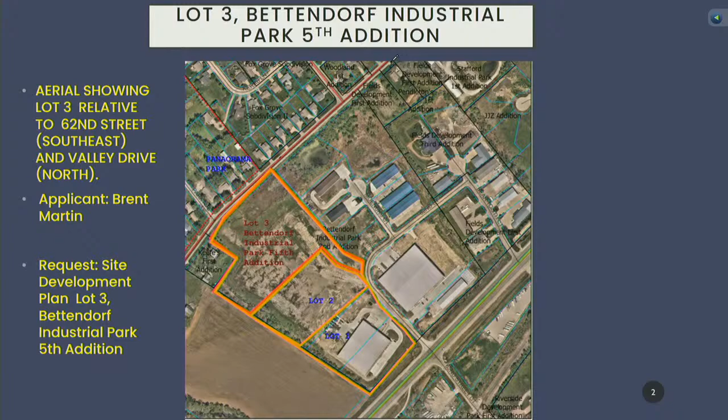Essentially, you have Valley Drive up here, acting as a boundary between the residential and industrial areas. It's been that way since 1972, when this all was redone in I-2 zoning, and that's what you have throughout this area. This is the lot we're looking at right here. Everything below Valley is I-2. You go to the area up here with the Fox Grove subdivision, that is R2, and then Panorama Park is all single family in nature.

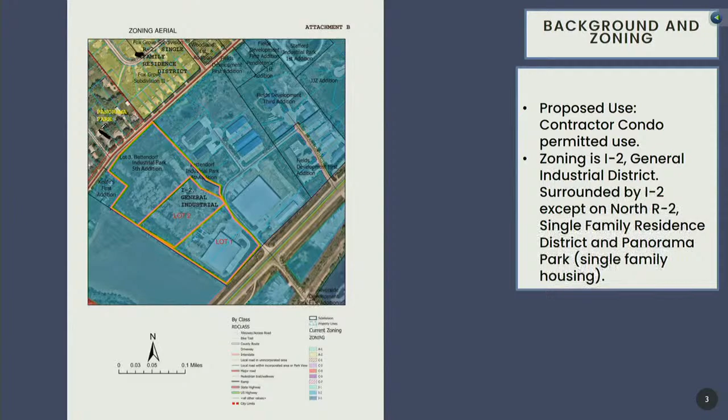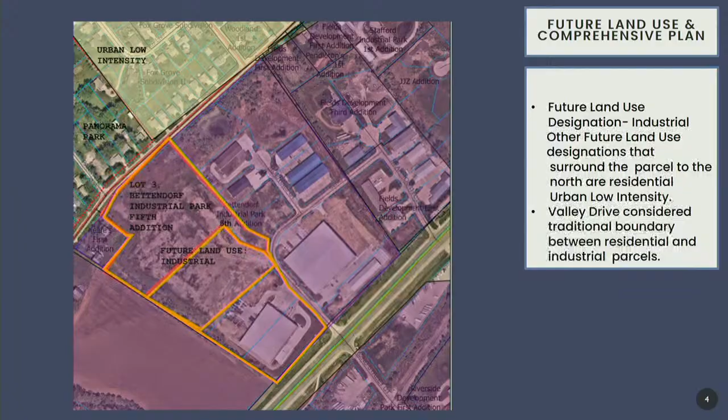The future land use designation for the area is industrial, which would permit the I-2 zoning. As I mentioned before, Valley Drive has been considered the traditional boundary between the residential and industrial parcels. The area we're looking at tonight is this lot of record, which was a replat done of Bettendorf Industrial Park 2nd Addition. And the entirety of the 5th Addition is essentially this area right here, and that was lots 10 through 13 of the 2nd Addition.

This is the site plan proposal with means of entry right here. This is a paved area with parking coming off of 62nd Street. The building is located right here. We have a 44-foot wide paved drive and parking area to gain access. We also have parking at this time being sufficient for that structure.

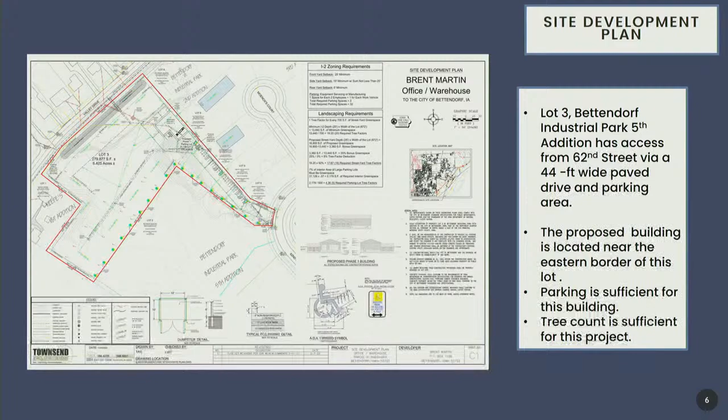Of course, everything as it's graduated in will require more amended site plans to do this, and the tree count is sufficient at this time for the locale. This is the potential staging, we have 8, I should say 9, other buildings that would be placed on this lot.

This is the current structure we're looking at. But just to give you a heads up that they intend to go forward with additional buildings, and then this whole entirety will be paved in the interior. And that'll require an amended site plan, of course, for every staged-in group of structures.

Water, gas, and electric primarily are going to be coming off of Valley. We do have a sanitary sewer connection that is stubbed right here. The stormwater essentially is going to be compensated for - we go back here to the outlet here. This is collecting water from other locales so that this area can then release water. This is the area that compensates for the release here freely off of this lot.

And this is the way the structure will look, typical of the contractor condos that we've seen. We do have garage and storage areas, and then the interior will have offices located.

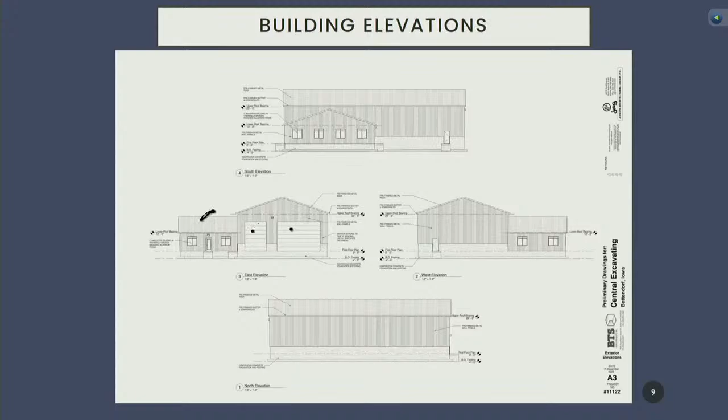As a result of the location of this lot of record, it is entirely contained within the 100-year floodplain. So there will be a requirement for the petitioner's engineer to submit the proper paperwork to elevate the entirety of the lot or the area being built out by 2 feet above the 100-year floodplain level, or the 1% annual flood probability level.

Staff would recommend approval based on the fact that this follows goal C of the comprehensive plan to attract and retain business and industry.

There are 5 conditions listed here regarding sanitary sewer, the annual chance of flooding, and the remediation of the ground to bring it up to a level out of the 100-year floodplain, and the sanitary sewer easement being sufficient on site. Valley Drive might be considered as a future entryway to this site as it builds out.

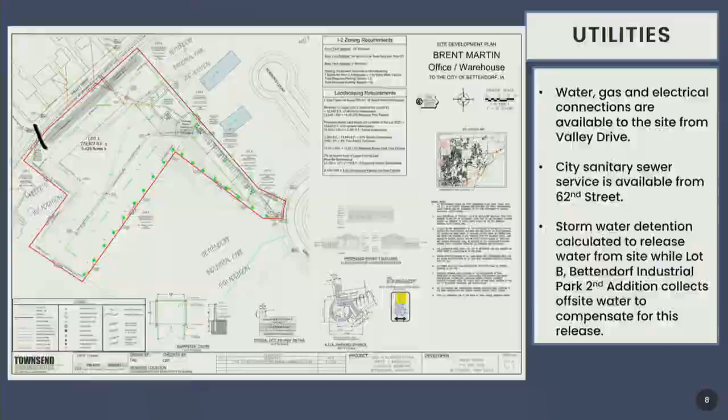Okay, thank you. And I believe there are some potential fire conditions that would require that. At full build out, if you're talking about 9 buildings, a secondary access would be needed. We would line it up with the street directly across, and we would try to limit the width as well in the future, so that it would not accommodate truck traffic. We would try to just limit it to residential type vehicles, so pickup trucks, nothing larger. But ultimately, yes, that would be the requirement upon full build out.

Okay, so that would be an expectation. Once he gets to that point, he needs to have that. Yes. Okay, all right. That makes sense. Thank you.

And it's Roy, while you're addressing that question, just a little more to bootstrap on that, that would be a private drive, right? Correct. Yeah, there will be no city street access through here. So would we have any concern about cut-throughs coming in off 62nd, cutting through there to get to Valley Drive, especially with the limited amount of connection points we have between State Street and Valley Drive?

Ultimately, that would be up to the developer to design the parking lot such that it wouldn't be an inconvenience to them if it did happen. Like I said, it's going to be required via fire code.

Okay. And then regarding, and maybe you're the right one to answer the next question, I don't know, but regarding the grading, the filling, all those kind of things, will the entire lot property be required to be filled when the initial construction is done, or can it be filled and graded in stages as it's developed in stages?

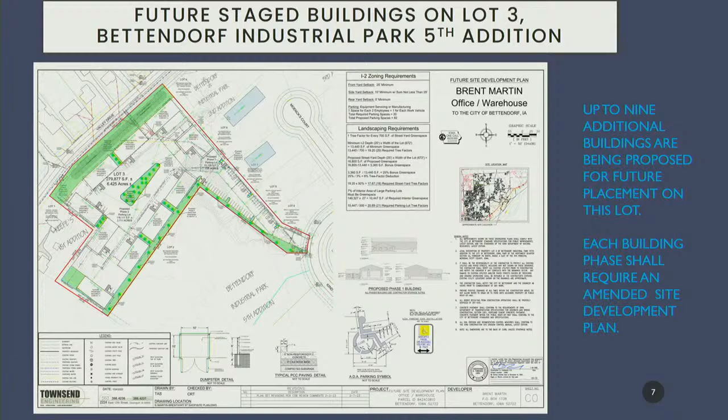Ultimately, Greg or Taylor, that would be a floodplain question. They'd have to secure that each structure is built, and I believe Taylor could elaborate on that, but I believe it's a two-step process, one initially for the fill, and then is there one after the structure is built to certify that it meets the elevation requirement.

Taylor here. Anything in the floodplain, any development requires a local permit, and that would need to ensure that any fill, excavation, or buildings don't raise the floodplain significantly for the buildings. If it is in the floodplain, they would need to meet our minimum 2 foot above base flood elevation. I will note it's currently in the floodplain, but there are some future maps coming out that might change this area. There are currently preliminary maps issued by FEMA. So in May this year, there'll be some updates to this area. We don't have those before you at the moment, but those are all considerations.

So if I understand Roy's question, what he's asking is, are they going to have to go through this process for each building if they don't do it all at once? Would that be? Yeah. Yes, okay.

Can I jump in, Mr. Chairman? I think there's two questions. Every building will need a site development plan, so if they're going to bring other buildings into this site, they'll need site development plans. They're going to have to have floodplain development plans that are approved as well. I think the question, and I don't know that staff can answer this, is will it be final graded all at once, or is he going to incrementally grade the property? And I think that's up to the builder if he's going to do that.

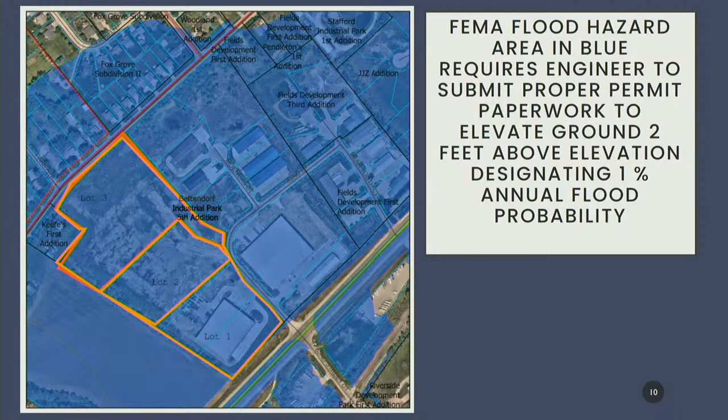I'll answer the detention question first, Roy. What Greg mentioned during his presentation is when this subdivision was built, the area in the northeast corner he's circling is a very low-lying area, and because of the overall topography, it was agreed that they're providing compensatory detention, detaining for water coming off-site to an equal requirement as what would be done on-site, because there was no way to provide detention due to the terrain. There would be no way to get that water to the detention basin and outlet it.

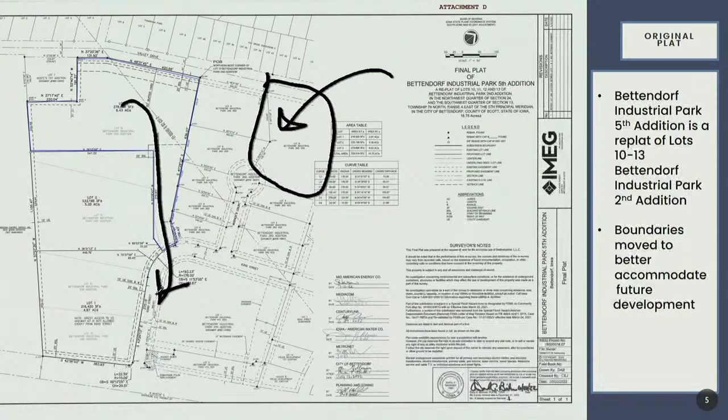Into ultimately the 67 ditch. Generally speaking, the way stormwater detention works is water generated off-site that we call pass-through is not required to be detained. You literally pass that through your basin and only store the increase on your site. So in this subdivision, approved I think in 2017, what we agreed to is they're detaining the water coming undetained down from the hill and releasing it through their subdivision, and their water gets undetained. It's still the same rate leaving the subdivision. They're just doing it in reverse.

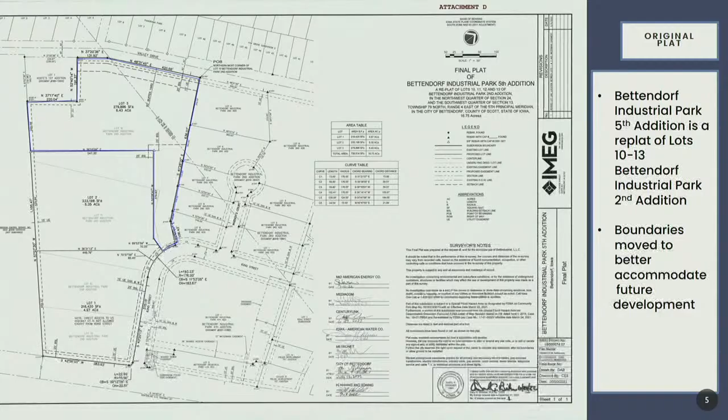Okay, thanks, that helps. Hi, Chris Townsend Engineering. I'll answer the question about the dirt moving. The owner of this lot is an excavation contractor, so that's pretty helpful. He will actually grade the entire lot, and really the majority of this lot is already above the floodplain. So we're in pretty good shape to begin with, but he'll take care of the entire thing right away. Then we will have to submit for future buildings depending on how they land.

Chris, it's Roy. Will that be stabilized with grass or something once it's graded? Yes, he has to. So he does this every day, so they're pretty good at it. All right, thanks.

Okay, any other questions? All right, anyone in the audience that might have a question? Okay, seeing none.

Anyone want to make a motion? Sure, I'll move to approve case 23-006, subject to staff recommendations. Second that. Okay, all in favor say aye. Aye, aye, aye. All opposed, same sign. Motion carries.

I think we're doing a switch here. What's that? I'll do my own slide. Hang on just a second.

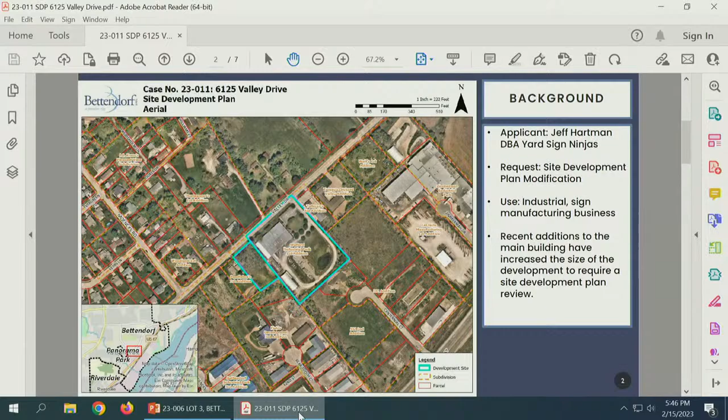So the site is shown on the map, Valley Drive, just north of Centennial Court with no access to Centennial Court. As mentioned, it's an industrial sign manufacturing business. This location is in the I-2 General Industrial District. To the north of Valley Drive there's single-family residential, and the surrounding properties south of Valley Drive are also in the same industrial district.

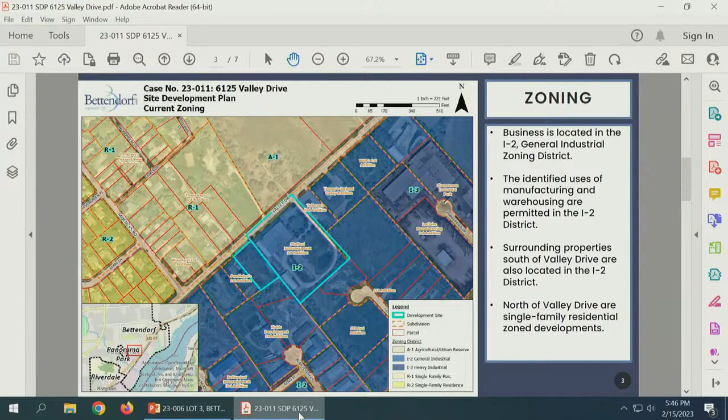The proposed site plan, or the site plan that identifies all existing infrastructure, is what we're looking at, seeing if that meets our code and making sure everything is in compliance, is shown before you. The original building was built in 1980, and that is shown here. Subsequently there were additions - some were an outdoor storage area that was enclosed, then some offices, and a hoop barn for storage, built in the 2000s. So we have some added additions that were implemented.

Parking area and loading docks are all located to the rear, and those aren't proposed to change. The parking for employees and limited customers is located off of Valley Drive, and it's accessed via a curb cut, which also isn't changing.

There has been some additional non-structural development, which includes filling of floodplain. There is floodplain back here, and some changes and fill being moved around on the exterior of the property. That's all included in the site plan review. Local permits had to be pulled for floodplain development and COSESCO permits for all the fill, since you're having bare dirt being moved. So those have all been submitted and reviewed.

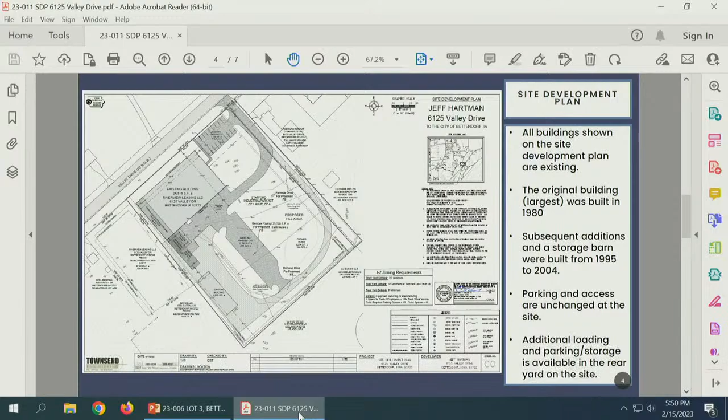Products are going to be, from what staff has been told, the same. There is some renovation occurring inside the building that will move the industrial process around, but that will not affect the overall site for this review.

With that, staff has looked at this from all angles and agrees that it does meet our code for site development and for the industrial area, and recommends approval for this modification to site plan for 6125 Valley Drive. Staff will note any future major modifications will require further review by this body, and I can take any questions.

Any questions from anyone? So Taylor, the note I wrote when I was going through this is essentially an after-the-fact action. These changes were made without the requisite site plan or other reviews when they were done. That is correct. The process would be to stop everything and make sure all the proper permits, whether building permits or floodplain permits, get the property into compliance. This is one step of that journey, and that's what's before you.

Was all that work done under the same ownership or multiple ownerships? I believe the owner has owned this property since 2012, so some of this could have happened prior to that, and in fact did. It's hard when there are incremental additions added over time, with 5 minor modifications that kind of go under the radar. Staff felt there were enough modifications to this site that it did require a review by this commission and then council.

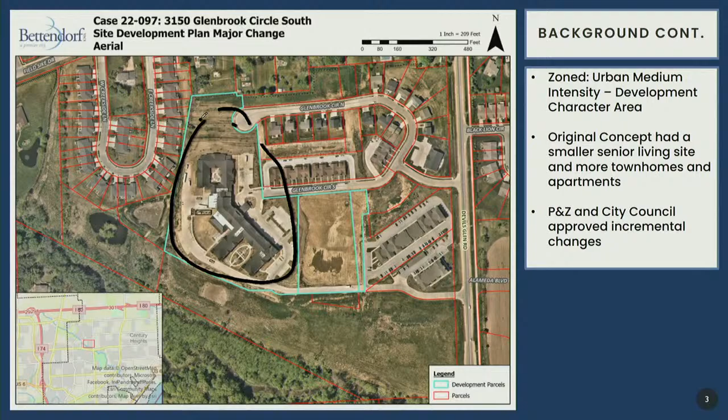A little more background: it's zoned urban medium intensity, a development character area zoning classification. The original concept had a smaller senior living site, which is the senior living site in question here. It was smaller in the beginning, and that has changed through some site development plans and replats that have come through this body. Those changes have been incremental in nature. The whole site, as shown in the original concept drawing here, has had incremental changes over time. Remember, it is part of a development character area, so that whole zoning district takes into account what will be developed within all of that area and how it might interact and play with each other.

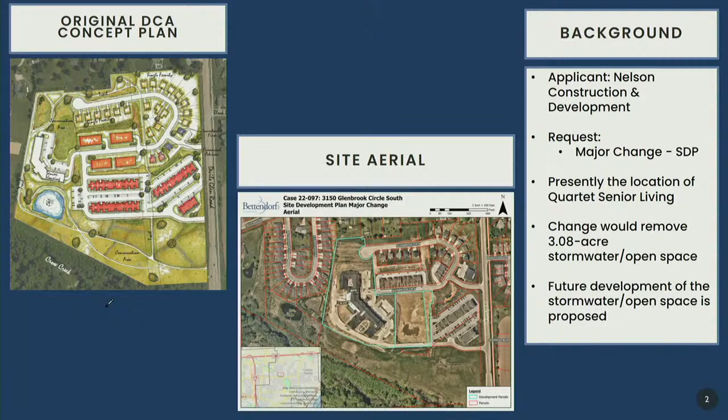Just to give you a little bit of a timeline, and refresh your memory on when you saw this case and how it looked at different times: when it first came before this body, it was a rezoning to create this UMI, urban medium intensity, development character area. That was back in 2018, case numbers 1896 and 1897. It was reviewed by this body, recommended positively, and subsequently approved by City Council. It was before this body on December 19th of 2018.

Came back again for a site development plan for the quartet specifically to start the building process after the rezoning. That was December 18 of 19. Those numbers are oddly similar, but it's really not that odd because of the way the dates fall on the calendar. And then in 2020, we saw a replat that brought this whole area into one lot of record.

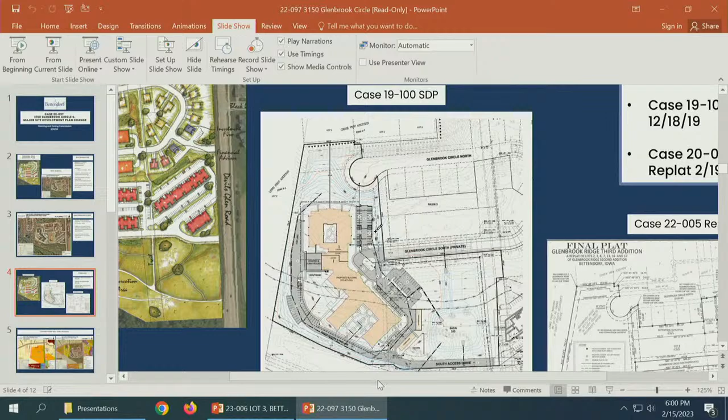That occurred in case 22-005. I will note on this plat that there are a few things that I think you should be aware of relative to this plat, and I'll zoom in here for a second to show you what those are.

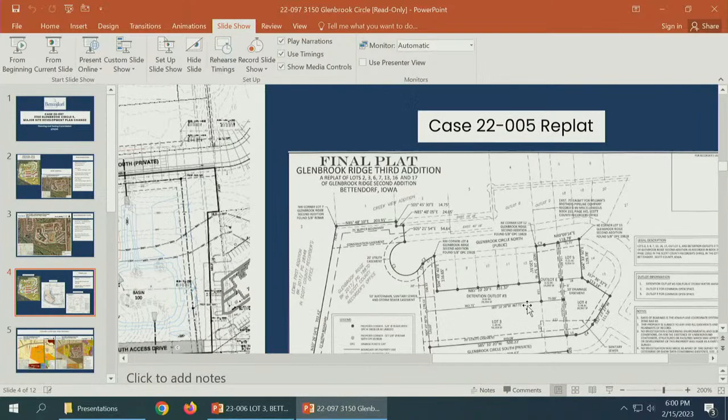Lot 2, which is the lot in question, is designated as detention area. And then Lot F, just to the east of that, is designated as green space. So you have a detention area and a dedicated green space next to each other as platted, and that's reflected in the plat notes. Out Lot F for common space is note 3.

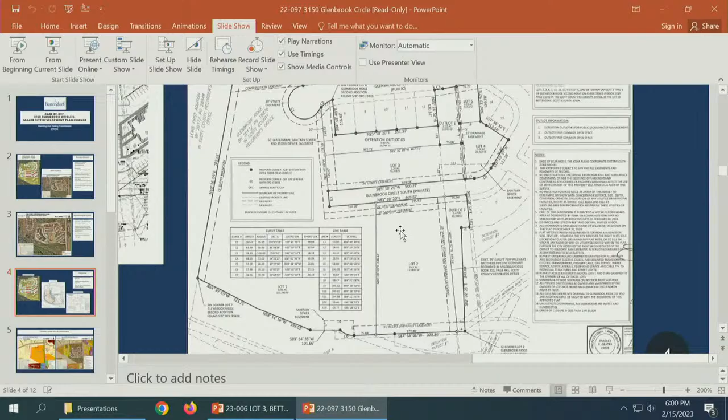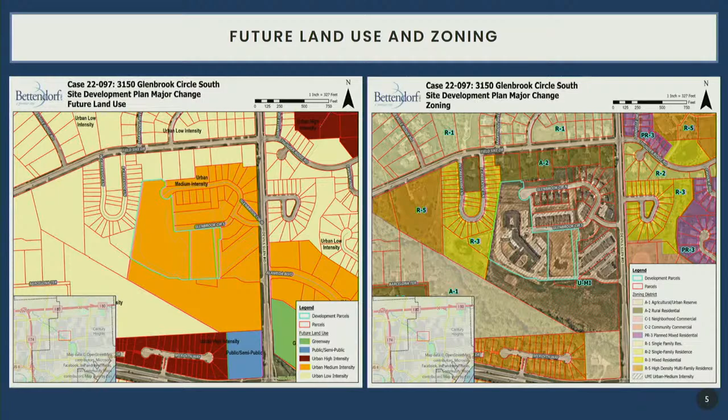Just to show you in map format, the future land use is urban medium intensity, and the current zoning is also urban medium intensity. Those are slightly different concepts, but the case being made here is they align, right? So we have alignment with our zoning and alignment with our future land use map. That's not an issue.

Background out of the way, let's talk about how we do this analysis. Our code is very specific on how we do site plan change analysis for development character areas. We're looking at this from a holistic view and a site view. We have the development character area, which is all of the Glenbrook subdivision, and you have the specific sites within, so you're playing those two concepts back and forth with each other.

Step 1 is an analysis of the permitted uses and intensity. The use that is existing, the senior development or senior living center, is a permitted use. And it would appear that the proposed use is also a permitted use, since it would be from the same company and be another style or type of senior living. So permitted use is not an issue.

So the impacts of the removal on the intensity side of this question: look at how many units per acre. It's kind of a simple math thing here. If you have X units per acre and you reduce that acreage by taking a lot out, or 2 lots out of that site development, you increase the number of units per acre, just simple math.

So the quartet currently has roughly 120 units on 11.4 acres. That would change to 120 units on 8.3 acres. So you shouldn't be surprised that there's an increase in the units per acre just by doing so. That's about a 37% increase. In units per acre, it's 10.54 currently to 14.46, again just by taking out that 3 acres.

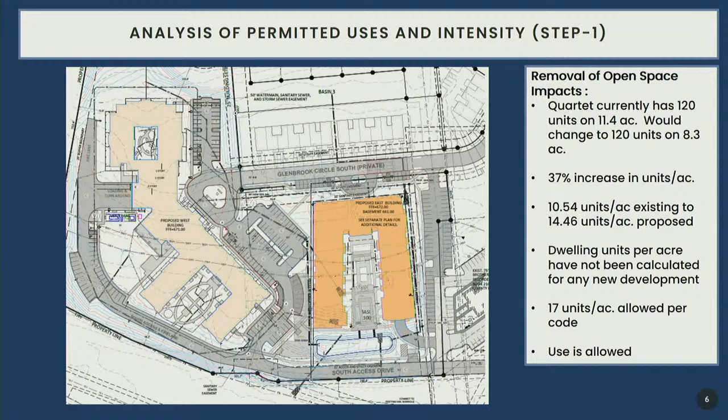I would note that 17 units per acre are allowed per code, so these changes are still within code. Even if you were to agree to take this 3 acres out, the quartet would still have enough units per acre, and I already noted that the use is allowed.

The next part of our analysis, step 2 if you will, is a bit about frontage. So within the development character areas we have the ability to design the lots and some design standards relative to those lots. One of the things they want is frontages and depths that kind of match, so you have roughly equal distance from the depth of the lot relative to the frontage of the lot on a road.

And as previously presented, this lot had frontage here and frontage here, and a depth of whatever this deepest part is. But those were roughly symmetrical, they were about the same.

If you were to take this out, your frontage is limited to roughly this. So your frontage characteristic is much narrower, and your depth stays the same. What that's getting to is really flag lots. We're trying not to develop a bunch of flag lots in our DCAs as a design aesthetic, and also probably as an access transportation issue. So DCAs were kind of designed to avoid that. This does, in fact, create more of a flag lot by removing that.

3.08 acres. Probably not a huge impact when it comes to the actual circulation, because if they were to take out the 3 acres, it doesn't remove any of their allowed or required parking. So that doesn't change, and the access as far as driving in on Glenbrook Circle South would still be there. But that doesn't provide for whatever parking and circulation might be caused by this use. Again, we're not really doing that analysis yet today.

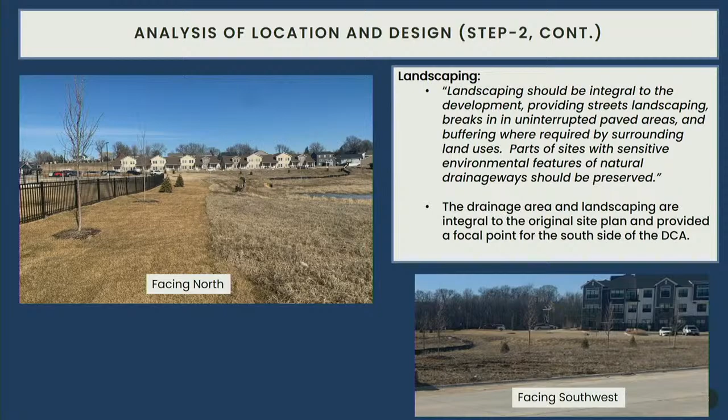I think we talked about stormwater management. There would be an impact of stormwater management. My understanding from talking with city engineers is that pretty much anything's possible with this much space. You could probably make stormwater work. You would do something underground or something deeper as far as a retention area. And we would have to do a formal stormwater analysis on the site development plan that came forward in the future.

Step 3, kind of proud of this slide. This was hard to put together. Step 3 is really about compatibility. In a DCA, we've created an overall character, so this whole subdivision should be viewed wholly. While we do have individual site development plans, those should always refer back to the original concept. That is the point of a DCA. And so, regardless of what's built, whether you look at the original concept, I would just point out why we're here, how much we've changed from the original concept in intensity of this use.

I would also point out that certain items of green space have kind of moved around this plan. In some areas, they were behind the quartet. When the quartet grew, they seemed to migrate over to this direction. Regardless of what happens here today, if we allow development to occur on the 3.08 acres, there will be some loss of green space and buffering and landscaping. The exact percentage or scale of that is really dependent on what's built.

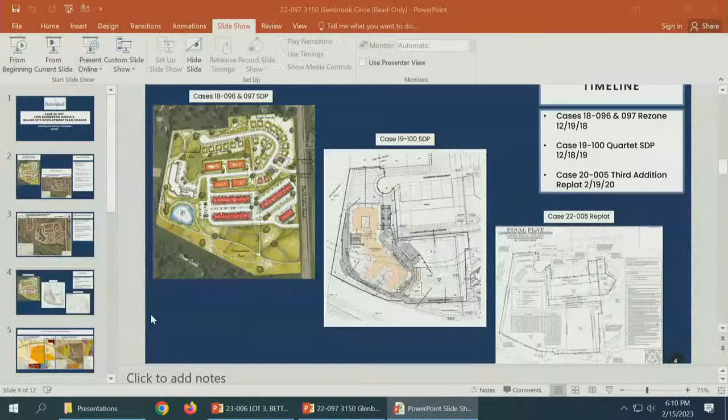So staff's recommendation—I have a quick flyover video I want to show you guys too, to give you a little bit better understanding of this site.

Staff recommendation right now is denial for case 22-097. We think the major site development plan change would result in an increase in intensity that's incompatible with the DCA plan. We think it creates lot frontage that does not meet the design standards of a UMI DCA, and would have a negative impact on green space and landscaping that was integral to the creation of the plan.

If you remember, that first plan had kind of the fountain water feature. That seemed to me to have migrated, maybe not to be a fountain and water feature anymore, but that green space migrated to become lot 2, the 3-acre lot. Sorry for the lot number mix-up. So we think that's kind of a negative impact. And then we think we're going to increase the imbalance of the desired housing mix beyond what we've already allowed to occur.

In preparing for today's meeting, I did have a chance to use the city's drone footage to get a flyover, bird's eye view, whatever term you want to use. First time I've ever done this. I hope it works, and I hope you're able to view it at home. But I would like you to get a flyover view of this.

Fingers crossed. So you're looking to the north, west, basically right now. Come on, computer. Actually good—when it pauses there, we get a little bit of a view. Yeah, there you go. Perfect.

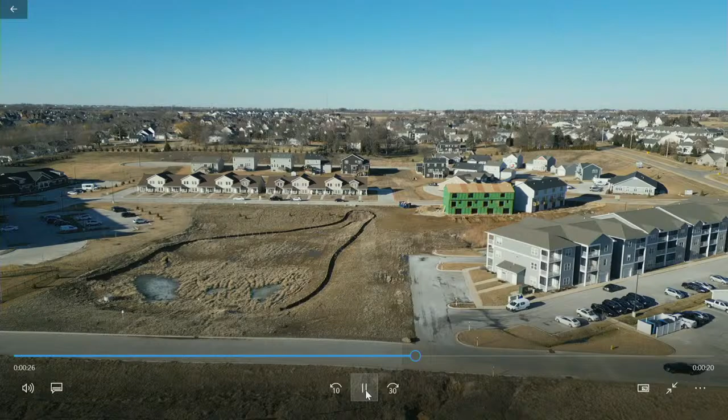I'm not sure why I'm paused again, but I just want to point out also the relation of height of building and shadowing. This is taken 2 days ago at roughly 3:15, 3:30 in the afternoon. And the shadowing from the 3-story building here—if there were some development to occur, I would have some concern, again in development character area, about creating shadowing on these townhomes that are kind of in the center of your screen here.

If you were to have a structure of the same height, south-facing, you would be creating pretty long shadows for a large portion of the day, depending on how high the sun is and all that stuff. But that's just something I would have some concern about.

Did you say those are rentals? I believe these are mostly rentals. There may be a mix of some owned and some rented.

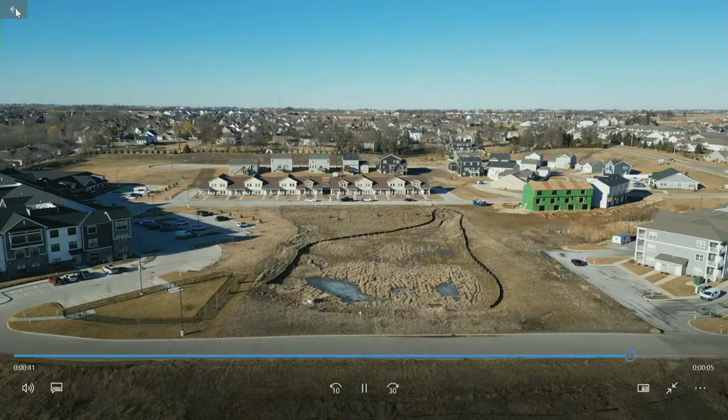Just a few more seconds left here. There might be 5 seconds left, but there's not really much to add after this. So, a new tool we're going to try and use, hopefully it was successful here today and gives you a little better understanding of the perspective of this case.

I would add that we did have one letter recommending denial of this case from a resident that's been put into the correspondence file, and it was also sent to the commissioners as well. But that letter did come out against the case being approved. I'd be happy to answer any questions you might have.

All right, any questions? Mark, this is Ann, I have a couple questions. First of all, I really appreciated having that drone footage. That was a really nice enhancement, so thank you for doing that.

Thank you, yeah, I'll thank the drone pilot. It's not done by me, I'm not qualified to do something quite that technologically advanced, but I will let the right person know. Yeah, I think that's really helpful for us to have and all see it together at the same time. Thank you, that's good, thank you.

When you showed us the concept drawings, and we've looked at a lot of different things, that area in the northwest corner by the cul-de-sac, would I consider that a green space? Are there plans to build more houses there or do more development? What is the long-term plan for that?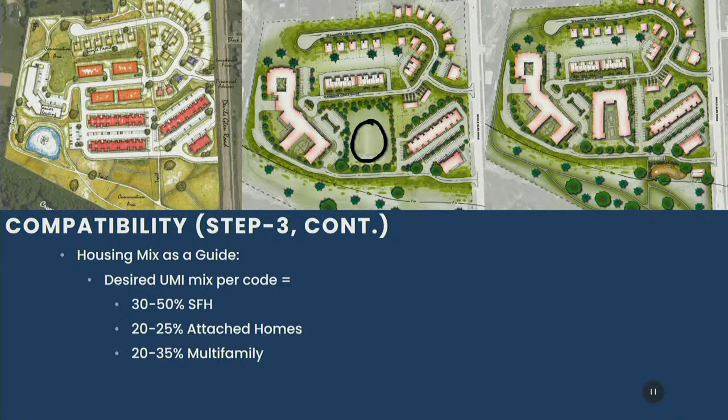Okay, so on one of the aerial plans you have, there's a kind of wet spot that's ultimately going to be the detention area, I assume. Yeah, I think that concept would move it to the south and make it deeper, and maybe underground storage, I don't know. Okay.

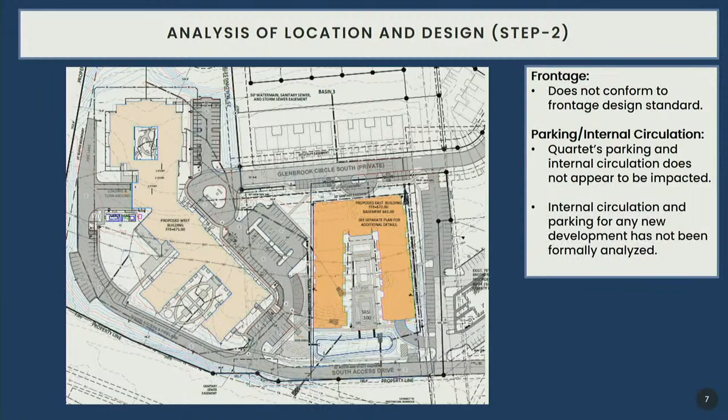So I guess I missed that part of it completely. It's not that they're completely eliminating it, but it seems to be, kind of to Ann's point earlier, this feels like there's been a moving target, and they're still operating as though they have the same amount of flexibility that they had initially. But as they fill in their site, that just logically diminishes, right? Because you don't have as much space to make adjustments with. So that's kind of where I'm coming from. It seems like if that's a piece of property they do want to do something on, there needs to be a little bit more consideration of the overall development, and recognition that they don't have the same flexibility they had when this was greenfield.

I'll be quiet now. Thank you, Corey. Any other commissioners wishing to comment?

This is Lynn, and I don't really have anything significant to add, except I was happy - I guess I'm in full support of staff's recommendation that we deny this, and I'm quite comfortable with a down vote on this, for many of the reasons my other commissioners just identified. There are times where we can't say anything else but yes, based on what's in front of us and what's come before us. This is an opportunity to say no for the right reasons. As I said, I don't have much to add, except I'm quite comfortable with the down vote.

Thank you. You're fine. Okay. Anyone in the audience wish to address us?

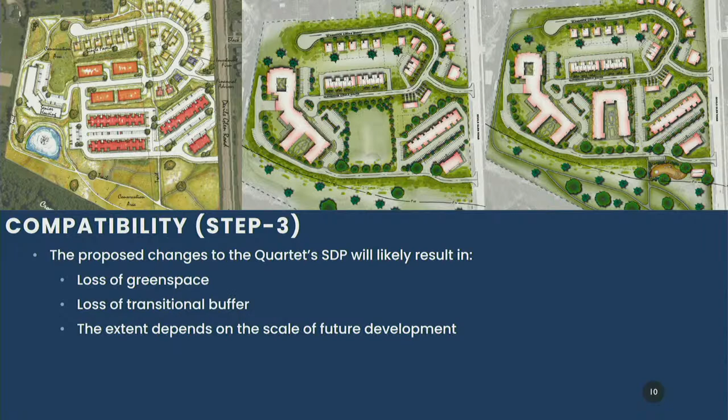So this is counsel for the petitioner: I'll tell you that wasn't my intent. If you remember the conversation during the staff presentation, one of the questions from the commissioners was, is this in its final state? Is this how it's going to look? I believe Mark said no, it's not in its final position, and there still needs to be work done on it. My point was simply that there is no obligation for the petitioner to do anything on that, to spruce it up, to make it look better. My point was to clarify that comment, that this could be pretty close to what it looks like in its finished state. That was my point.

In terms of the construction site, I don't know what's happened from the beginning. I don't know if you were able to attend the opening of this senior living facility, the Quartet. But if you go over there and take a look, you'll find that it's first class. It's probably the nicest facility in the Quad Cities, and that's consistent with what Nelson does and with their reputation.